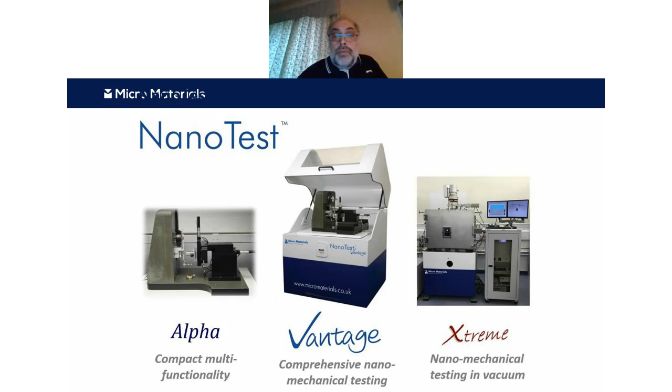So those are the three tools we tend to base our work around. But of course we are a modular system - our philosophy at Micro Materials is to provide high-level research instruments and high-level application support. We very rarely produce two instruments absolutely the same.

You can see on the base system - this is the Vantage system - you can choose loading heads, you can choose your experimental modes, imaging modes, environmental modes, study modes, temperatures up, in this case of the Vantage, up to 850 degrees centigrade.

And other experimental add-ons. Our systems are generally retrofittable, so we can retrofit these devices to current systems in the field, depending on the age of the system. Generally upgrades are done in the field as a general rule, and therefore relatively cost effective - there's no shipping back of instruments. That's the philosophy we have: to keep your instrument completely updated and in line with current specifications.

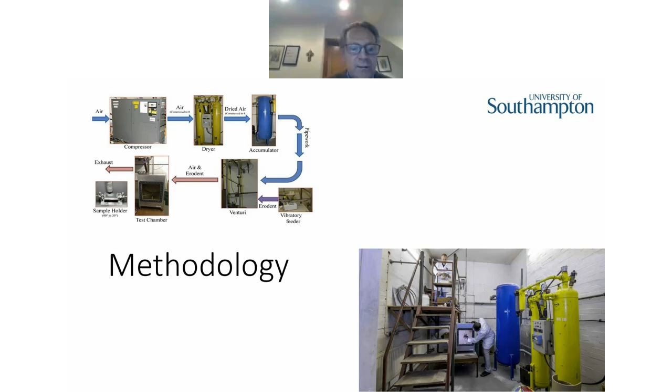The methodology was to do some experiments at low temperature. This is our air sand erosion facility up at the Science Park at Southampton, and it allows us to accelerate particles up to about 280 meters per second, and impinge at different angles. You can look at different particle sizes, particle concentrations.

This was modified by a group design project, our fourth year students, to allow us to cool the system. There is a liquid nitrogen supply in, so the sand comes into this red bit here, into accelerated airflow, into a venturi, then it's slightly expanded, mixed with the liquid nitrogen, and impinges on the grey sample there, with temperature measurement just below the sample to allow us to control the sample temperature. That's the erosion experimental side of things.

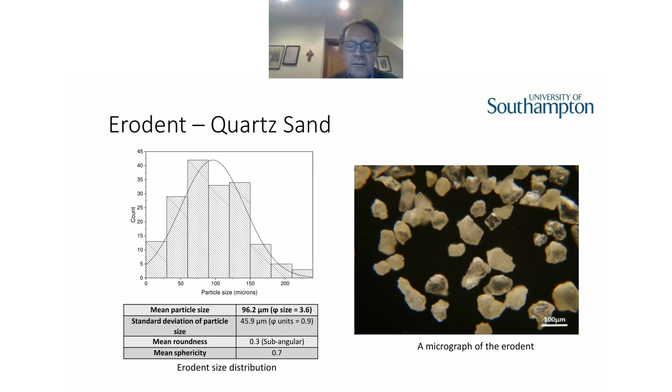The erodent we chose was sub-angular quartz sand, with quite a wide particle size range, although the average is just under 100 microns. The distribution here is quite broad, so there were quite a number of small particles - I'll come on to that later - and equally some larger than 100 in the mix. So that was the type. They are quite angular, with some rounded, so you're likely to get a slight mixture of erosion mechanisms just because of the shape of the sand.

That's what we were looking at. We tried to operate the erosion tests at ambient, so at 25 degrees, and then with the cooling system the students deployed, we could go down to minus 30.

This is a fairly basic test: you weigh the sample before, which is quite difficult with polymers. We weigh as accurately as we can to try and get some assessment of volume loss per particle impacting. The sand concentration, as you can see, is 1.3 times 10 to the minus 4%.

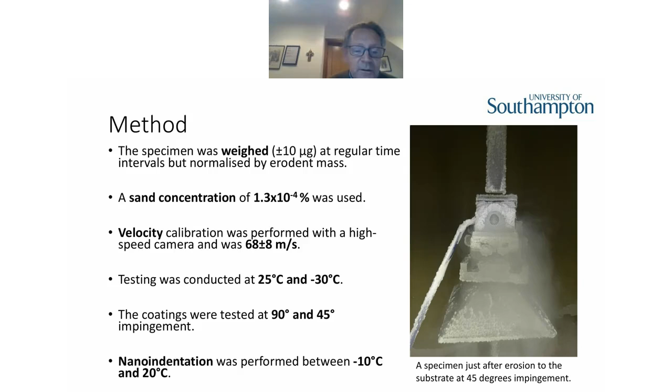We also used the Micro Materials system to get measurements using their nano indentation Vantage system, both at ambient and at minus 10. There was a cooling stage that let us cool both the indenter and the sample, so we could go from ambient down to minus 10 and do controlled depth-sensing work to look at the mechanical properties - hardness, Young's modulus, etc. - from the systems. We were hoping that would give us some insight into explaining the performance you get from the erosion rig. That was the plan, anyway.

So just quickly, some results. The bottom line here - in red on the left-hand bar charts are the ambient results, and the blue are the colder ones. There is an influence of angle, and certainly a very big influence of temperature. As you go down to minus 30, the erosion rate dramatically increases, and there's a subtlety between normal impact and 45 degrees. Those were the basic results, and we plotted them here.

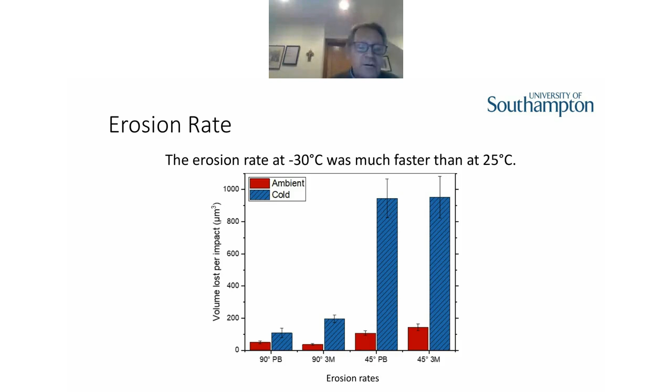As I say, we measure the mass loss, convert that to a volume loss, and then we know how many particles impinge. This is quite a large sample area, so most particles will impinge onto the surface, so you can get a volume loss per impact of sand - a very small volume loss per impact, in cubic microns.

You can look at this ratio - the difference between the erosion rate at 45 degrees and at 90 tells you whether you've got a ductile system or not. If this ratio is above 1, it's ductile; if it's below 1, or around 0.5, it's brittle. We were anticipating some increase in brittle behavior as you go down in temperature, but we didn't actually see that - the numbers are quite high for both systems, going higher, way above 1. So there is an increase in ductility from the crude mass loss rates against ambient.

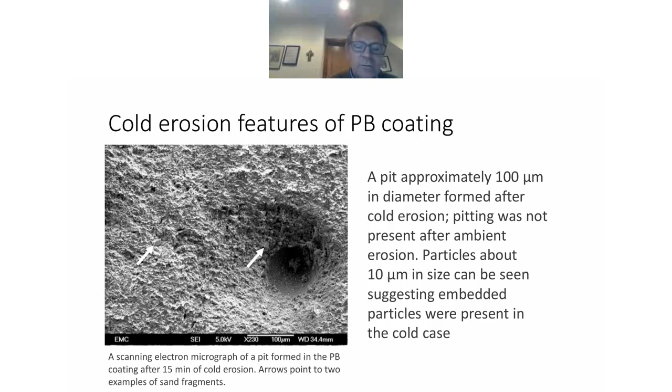If we look at the brushed polyurethane, the 3-layer system on top of polyester, there were some quite dramatic pit features here, and also some fragments or embedment of small particles in the actual coating. You've got quite concentrated loss of coating, which is undesirable, but you also get some embedment which will affect the mass loss—you sort of get a mass gain because you've caught sand in the system.

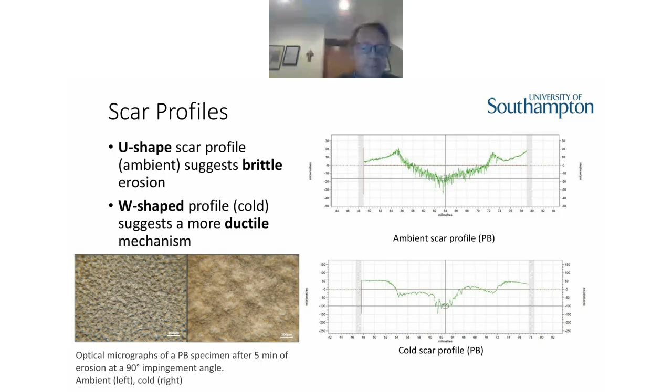If you look at the surface profilometry, a U shape suggests slightly more brittle behavior, perhaps depending on the angle of particle attack, since you get a spread of angles. But if you go to the cold one, you get a much more complicated profile, some pitting and more of a W shape, showing a bit more ductility and ductile process going on as you go colder, which was slightly unexpected. You can see some optical microscopy here of what the surface looks like—so the mechanism of erosion is changing as you go down in temperature.

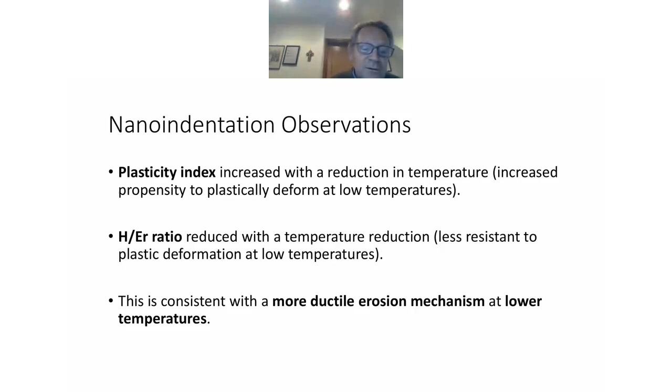So just some conclusions then. The erosion rates definitely are higher with lower temperatures for the polyurethane. There's cracking at the PE layer, which would need to be sorted out going forward, because that will take the service life of the top coats down. It looks like it's more ductile at low temperatures, which is a surprise. You've got nanoindentation confirming that the plasticity index increased at lower temperatures.

The blackening — if you look at the literature, there's some work suggesting that very locally there are thermal inputs possible here, which may well explain some of the processes. So it may be that local heating means the polymer behaves quite differently to what we perhaps were expecting, and sort of plastic mechanisms occur giving enhanced loss, and it might correlate to the blackening of the samples as well. There are other possibilities of stress wave reinforcement or shear stresses that might be explaining why you've got the cracking of the polyethylene underlayer there.

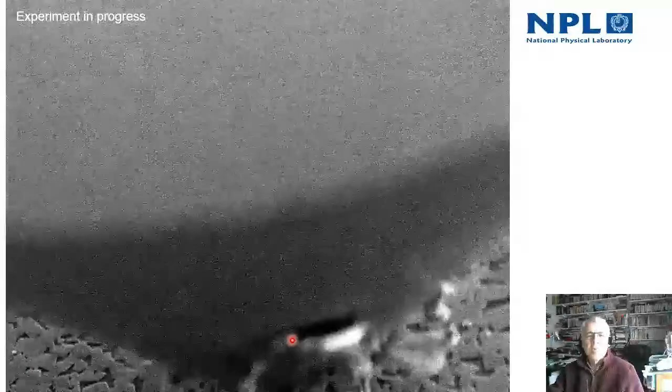So here you can see an experiment actually being carried out, and here an indenter is lowered against the sample, is then dragged across the surface backwards and forwards, and you can carry this out automatically for any number of repeat scratches.

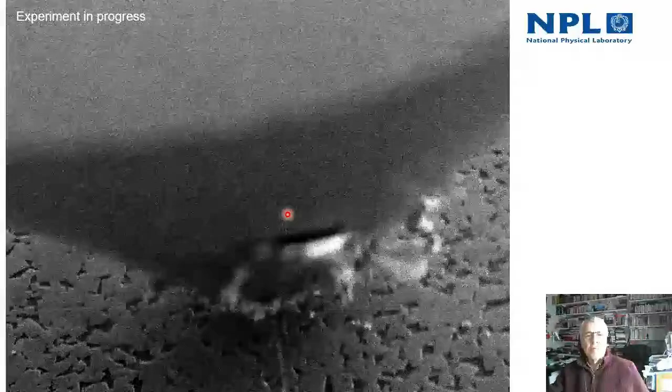The beauty of this is you can actually see the detail of the interaction of the indenter with the surface. In this case, you can see debris that is removed from the surface and is produced there. And when you look at high resolution images, you can see the details of the interaction of the probe with the material and how the damage relates to the microstructure of the material.

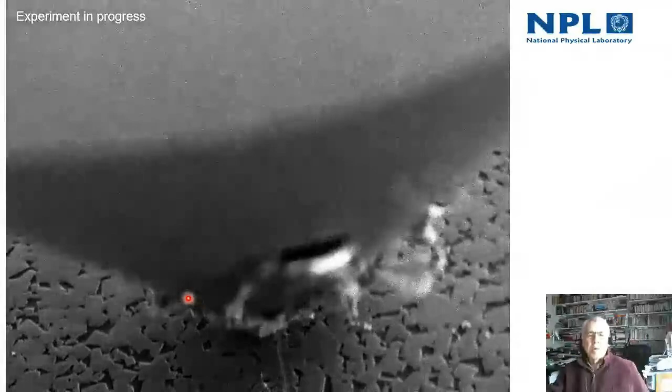So in the next few videos I'll show you, we have rotated the image and we have captured a series of images automatically that show the progression of damage one to another.

So I'll now explore the use of this equipment with examples on 3 different materials: tungsten carbide cobalt hard metals used as tools all over the place, additive manufactured materials which are of current interest, and DLC coated materials.

So in this first example, this is a tungsten carbide cobalt, and you can see the typical structure in the regions away from the scratch of tungsten carbide grains embedded in the cobalt matrix.

And the beauty of this sort of analysis is you can see the detail of how the material behaves under the effect of the mechanical overstressing from the, in this case, diamond indenter. And you can see here that grains of material are fragmenting, they are embedded into the surface of the cobalt, they then flow out from that and into the surface.

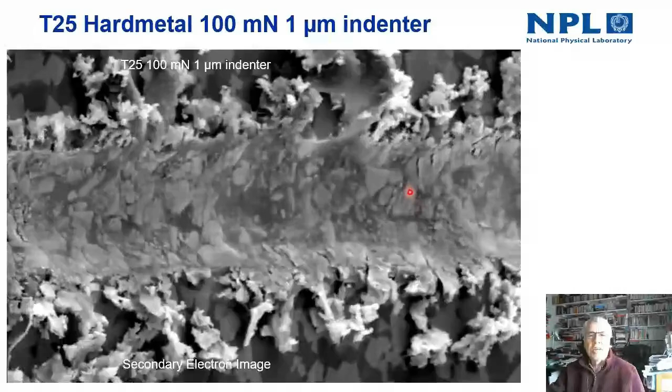So for example, look at this grain of tungsten carbide here, which gradually fragments and is reduced to rubble almost.

And then finally, here's a cubic carbide containing tungsten carbide cobalt material, and if you look at the circles in particular, here are areas where there were specific grains which eventually accumulate damage and then just break apart and fragment and are removed from the surface.

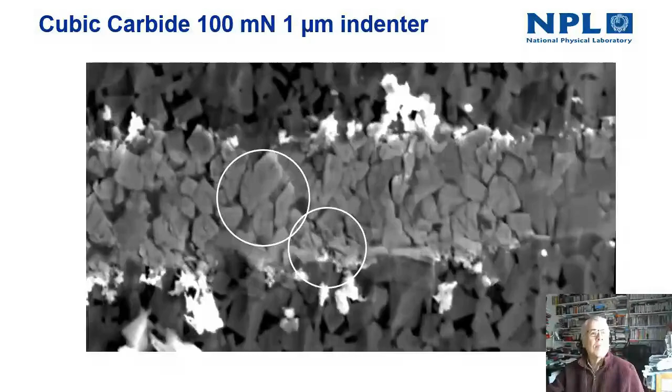So moving now on to additive manufactured materials. This is an example of a collaboration with Imperial College in London, and they were working on how the processing conditions for additive manufactured stainless steel, and there are 3 different processing directions shown here. These 3 images compared to the wrought material shown here, and we're looking at again how the material responds to a single point.

Abrasion process, repeated scratching in a single plane on the material. And here they're looking at details of the differences in deformation that were found between one of the processing directions and another processing direction, and indeed comparing that to the original wrought material.

This image shows the edge of one of the scratches, and it shows a lot of the detail to the side. So you can see a lot of slip line traces showing the detail of deformation in grains to the side of the material, and you can see something called conjugate slip, which is multiple slip planes being activated.

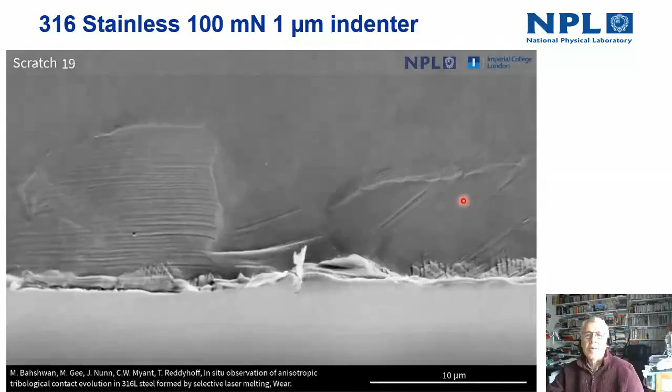And one of the features that interested me in particular here was just here you can just about see a crack forming in this grain. So severe damage and failure is beginning to occur here. This is just outlining where that slip area is.

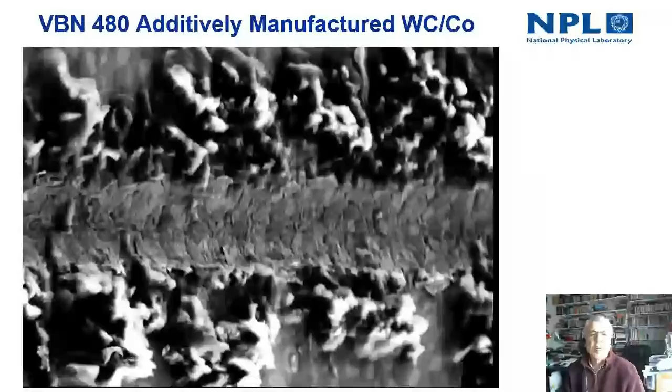This example is a VBN 480 additively manufactured tungsten carbide cobalt material. You can see how the damage occurs at the base of the scratch and the relationship of that with the microstructure of the material. So again, you've got slip lines, you've got cracking, you've got all sorts of damage occurring there. And also, interestingly, you've got these areas where material is pushed out to the side of the scratch itself.

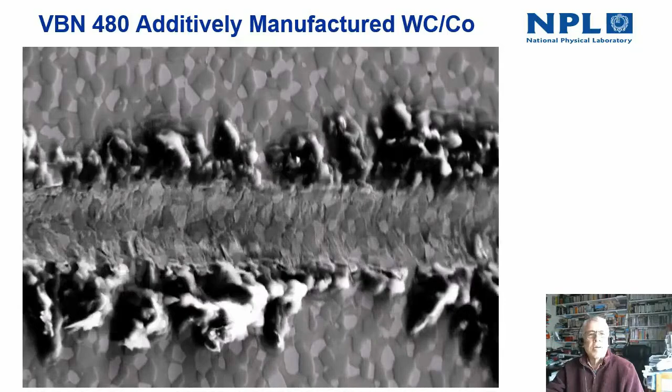And eventually delaminates from the surface and is removed. This work was carried out in a collaboration with the University of Manchester and the manufacturers of the material itself, VBN Components.

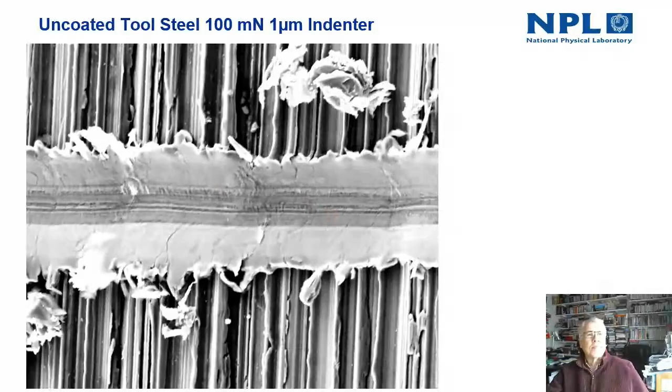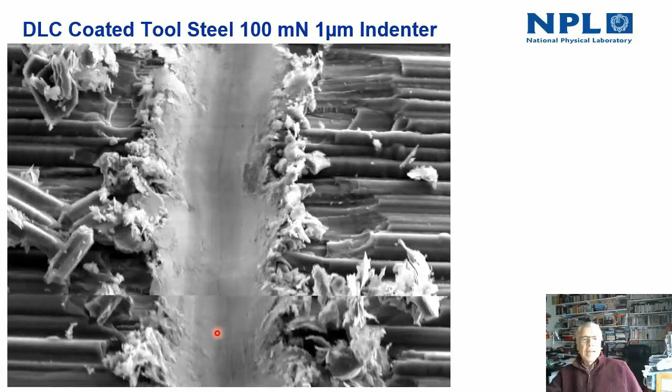This contrasts with the behavior in this experiment, carried out under exactly the same conditions, the same sample as the previous experiment. But here, after the first pass or so of the indenter over the surface, you got totally different behavior. Fragments of coating have just been removed from the surface, and here you see a fragment in motion as the indenter repeatedly moves backwards and forwards over the surface. You can also see in the base of the scratch, as it develops, a lighter area of contrast, where the coating has been removed completely, showing the underlying substrate beneath the coating.

So I just wanted to spend a few moments on relocation profilometry.

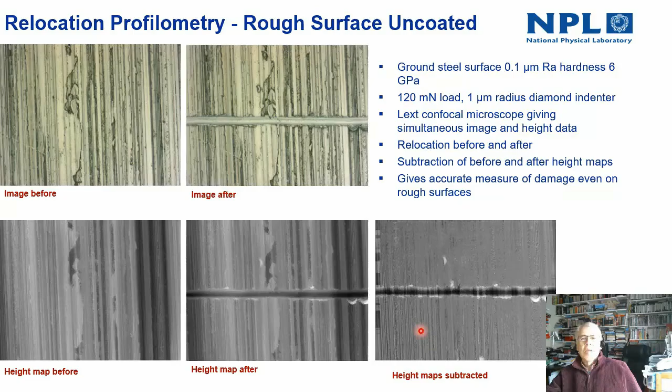Here we've got two roughness values, the rough example you've seen already and also an average material, though I haven't shown any micrographs of this one. In particular, if you look at the loss area, equivalent to the volume of material lost, there isn't any difference between the results for the rough and average samples, but there is a huge result for whether the sample is coated or not — over an order of magnitude difference here.

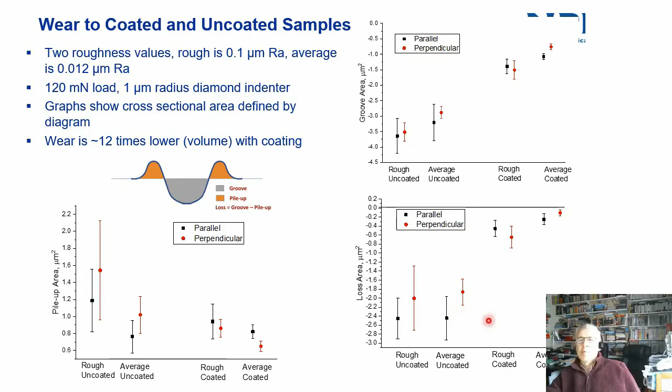So summing up, we are showing you an in situ microtribology test system that's been developed for use in situ in the SEM, but can also be used ex situ. We've carried out a wide range of experiments relating deformation and failure mechanisms to the microstructure of the materials. We've demonstrated it being applied to tungsten carbide, cobalt hard metals, additively manufactured materials, and coated samples. Relocation profilometry is also useful to examine the absolute value of wear, even on rough surfaces. Thank you very much for listening.

Stefan asked, what is the force resolution in the normal and lateral mode of your system? You answered that the resolution can be tailored by changing the fixture elements within the current configuration—it's about 1 millinewton.

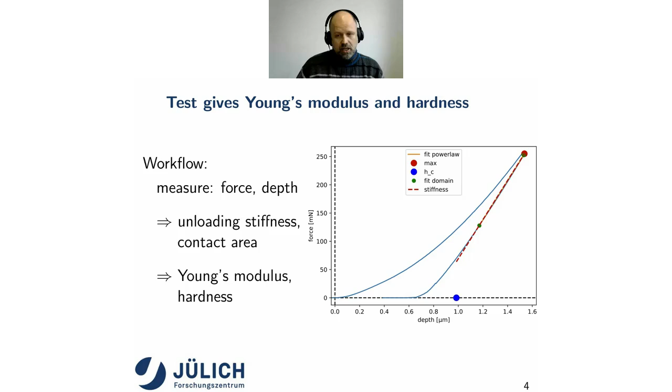As a reminder, typically you measure the force and the depth. From the force and depth you calculate the unloading stiffness. From the unloading stiffness you determine the contact area. Both are evaluated, and from the contact area you then know the Young's modulus and the hardness.

To do this, you generally first have to determine the frame stiffness: how your sample is mounted, how it's glued, how the tip is mounted. You need to know the shape of your tip, called the area function calibration, and how this shape evolves over time. For calibration, fused silica is the material of choice, with a rather low Young's modulus. If you want to indent steel or tungsten, you do extrapolation, which is also prone to inaccuracy.

Lastly, the surface contact has to be identified pretty accurately, which is extremely challenging for high temperature indentation, where there's temperature drift and everything is moving. That's where this work sets in: can we use automatic image recognition to enhance the current use of nanoindentation?

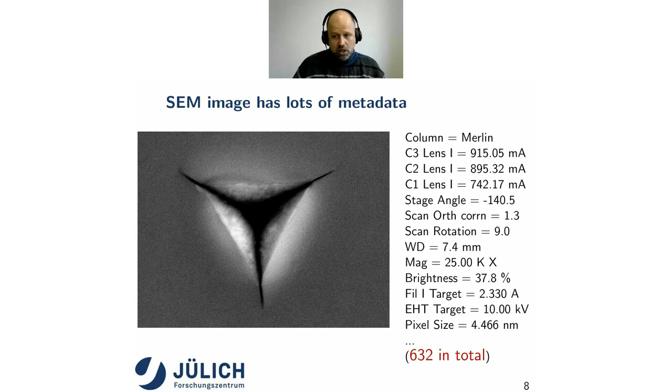If we look at an indent in the SEM, this is how it looks on silicon. You can see the silicon has even broken a little, but you see the imprint. The image we get here, from a Zeiss microscope, contains lots of metadata which we can use to precisely determine the length scale, which is definitely needed to know how large the indent is.

This image recognition is very popular. Even when you drive your car to work in the morning, you might use image recognition to tell you the speed sign on your way.

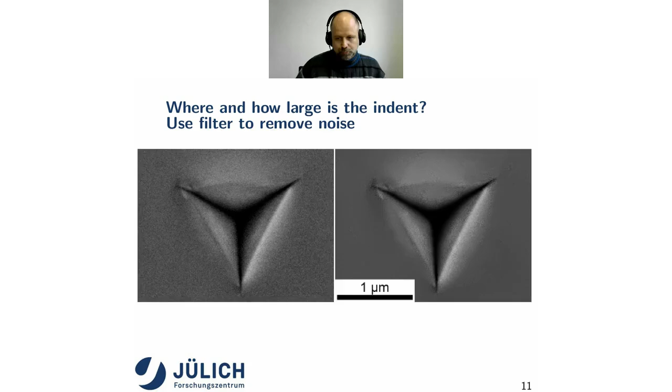The first thing we do is zoom into the image, just for you as the audience to observe it more clearly. Then we clean it up to get rid of noise, which is easier in the surrounding area than in the area of the indent itself. Then we threshold it by a lower and upper boundary, giving us basically a black star and the white areas surrounding it. Now we can use this information to determine the contact area.

In the first approach, we use just the black area and its three corners to identify the corners of a triangle, then calculate its area. In the next approach, we use the white area and draw a convex hull around it, but that area is definitely too large since it includes lots of plasticity. The third approach uses the convex hull we identified, but then draws an equilateral triangle into this convex hull circle, giving us a third approximation of the contact area.

Once we have the contact areas in pixels, we can use the metadata I just explained to calculate the real contact area.

And this is how it looks like in detail. The blue line is a connection of the 3 black distant points. The orange line is the convex hull of all the white areas. Then we draw a circle around this convex hull and can draw a triangle into this circle, which I have not shown in this image, just to make it easier and more clear.

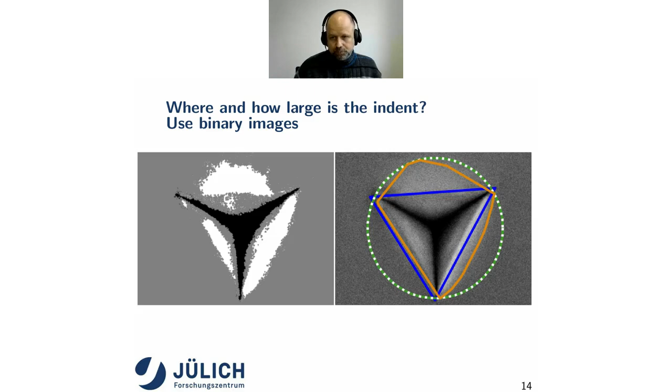So now we know the contact area. Once we know the contact area, we can use nanoindentation analytics to determine everything like Young's modulus and hardness.

And we use these 5 unloading cycles to determine the frame stiffness for each sample that we use. So let's say we have 5 unloading cycles and 16 indents or 16 measurements, and we have roughly 80 unloading cycles, which we then can use to determine the frame compliance for this specific sample.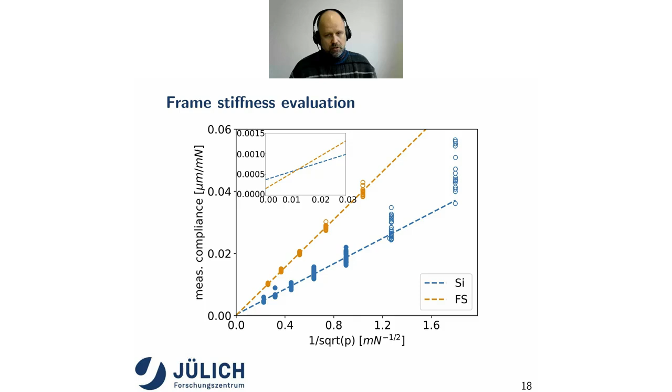And that's what I really want to drive home here, is that the frame stiffness evaluation, which is the intersection of the blue line with the y-axis, is not constant. So different materials will lead to different intersection points just because you have mounted them slightly differently.

Once you have the frame stiffness or frame compliance, however you want to call it, you can calculate the hardness and the Young's modulus. The hardness, well, that's according to textbook, force divided by area. The Young's modulus is a reduced Young's modulus, but if you use the Sneddon equation, which goes into the traditional way of calculating the Young's modulus during nanoindentation, you subtract the compliances, and then you can also, from all the data that you have, calculate hardness and reduced Young's modulus.

And just as a reminder, the contact area we obtain directly from our SEM results. And the important point here is that I did not have to know anything about the tip shape. Well, I knew that it's triangular, but nothing else. I did not have to identify the surface contact, and all the drift that accumulated during loading did not enter my evaluation. So those points are rather good.

But the real test is how does this method compare to the traditional way of using what is called the Oliver-Pharr method. And if we do that for the hardness, we see, I told you before, we have these three measures, or three ways of measuring the area. One is triangle of corners, one is the triangle in the circle, and one is the contact in the pileup. And then we compare it to the traditional Oliver-Pharr method.

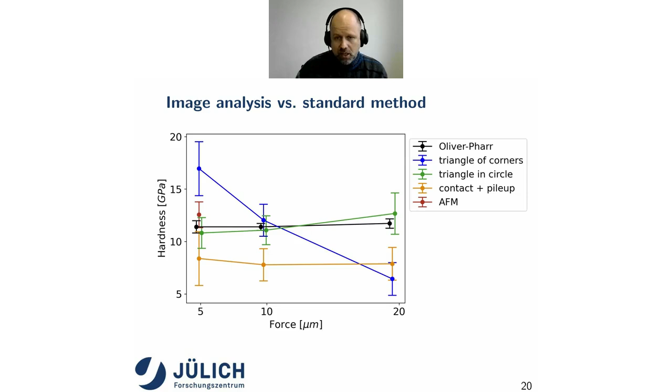To discuss the challenges, this data science approach and image recognition has some potential, definitely. Especially we see great potential at high temperature, where the artifacts that are traditional in measurements don't manifest themselves. This material, silicon, was definitely very difficult for this pilot study, and we definitely have to improve the algorithms to better identify the contact area.

The great advantage of companies like Google is they have lots of manpower, and they only have to identify whether the speed sign says 60 or 65 miles per hour. They don't have to say the size of this image, and the precise size evaluation is a little bit more difficult. In these cases, it was very helpful to us to look at the metadata, especially when we want to link the SEM images to the nanoindentation positions. The metadata, which is saved in all cases in the SEM data and in the nanoindentation data, is very helpful for this linking, and then we can automatically link the measurements.

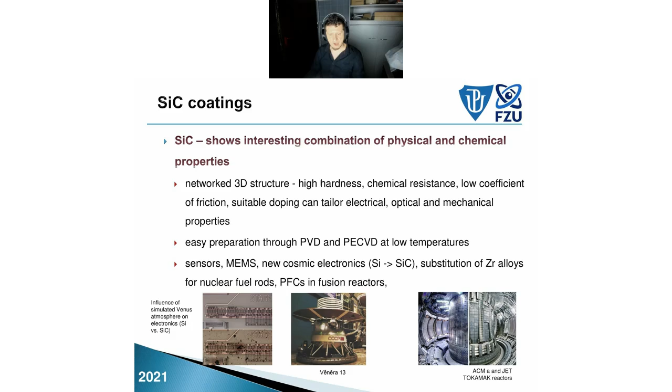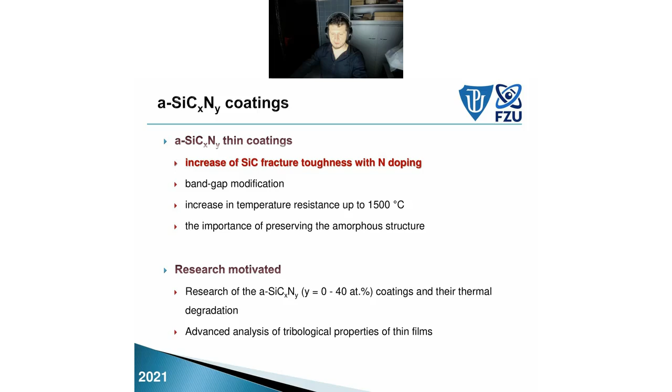How to change it? As I said previously, we can dope it. In our research, we doped it using nitrogen to improve properties, mainly mechanical properties and heat resistance. We doped it in different ratios to observe the results, and we performed several analyses: composition, structure, but mainly I will talk about mechanical and tribological properties.

Our coatings were prepared using DC magnetron sputtering from a silicon carbide target. We used an argon atmosphere in the chamber and increased the ratio of nitrogen to argon in several different ratios, and these ratios give names to our coatings. Here you can see our several coatings, from pure silicon carbide to silicon carbonitride with increased nitrogen composition, and I will show you soon how this ratio affected the real elemental composition of the coating.

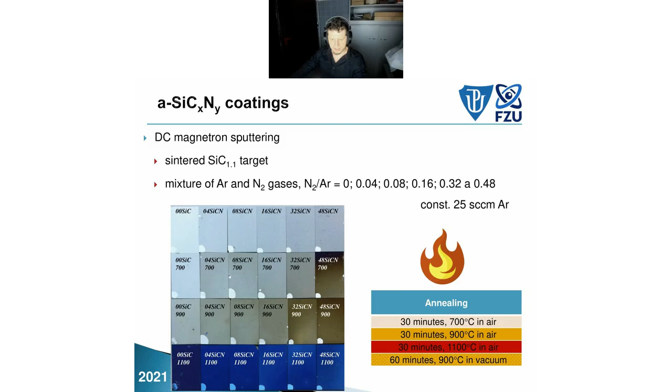After annealing, we performed several treatments at 700, 900, and 1100 degrees Celsius, and you can see here how it affected our samples visually. There is an interesting coating creation or oxidation layer. To analyze this oxidation layer and eliminate its effect, we also annealed in vacuum. We performed several measurements, but I will mainly focus on mechanical and tribological properties.

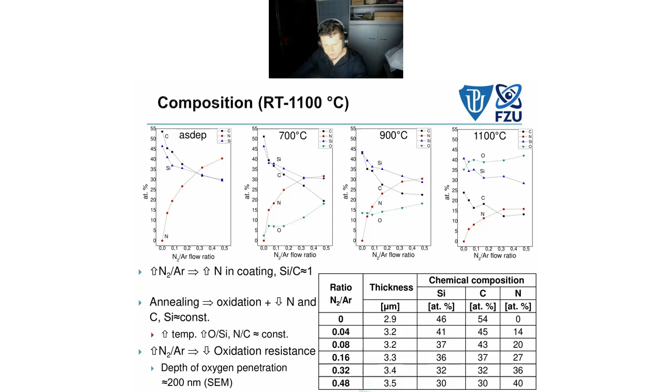Composition: different ratios give rise to different compositions. As you can see, we have roughly a 1:1 silicon carbide, silicon and carbon composition, and increasing the nitrogen-to-argon ratio increases the nitrogen content. After annealing, oxygen increased - so apparently we have oxidation here - and nitrogen decreased, while carbon also decreased a little.

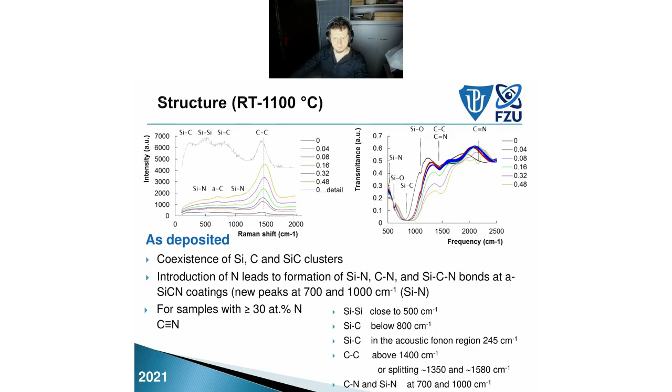So we have strong oxygen penetration into the material and creation of an oxidation layer, something like 100 to 200 nanometers thick. Structurally, it's generally an amorphous structure, and introduction of nitrogen leads to formation of Si-N, C-N, and Si-C-N bonds. After annealing pure silicon carbide, there is creation of silicon carbide nanocrystallites - not full crystallization, but partial crystallization. In silicon carbonitride, there is a splitting of the carbon-carbon band, indicating graphitization. So we can see that oxygen and nitrogen promote organization in the carbon phase.

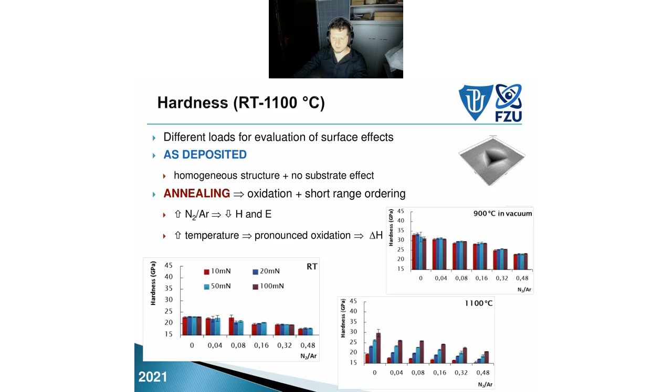This is annealing in air, so we can see this oxidation layer effect is much stronger. But overall, this system has higher values, at least at 900 degrees Celsius, which means there is an increase of hardness and mechanical properties due to short-range ordering, but also surface effects due to oxidation. We tested this oxidation effect using vacuum indentation, because during vacuum annealing at 900 there's no oxidation layer formed, so we see no depth effect during indentation, just the increase in mechanical properties. But let's check the tribological tests.

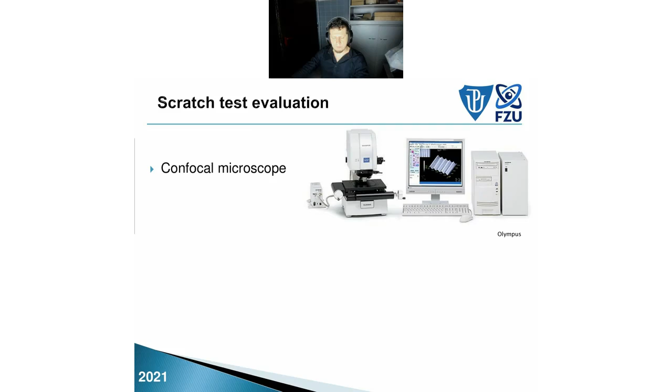We used progressive scratch tests, the standard scratch test from zero to maximum load, and analyzed it using different techniques. Typically, when analyzing tribological properties during scratch tests, pin-on-disk tests, and other tribological tests, you use optical evaluation. We also used a confocal microscope, which gives better resolution than a normal white light microscope. Here are some pictures. We more certainly use the depth change record from the nanotest itself to evaluate the cracks or delamination of the coatings - the jumps in depth.

I will speak a little more about acoustic emission, because we have developed our own system of acoustic emission detection during the scratch tests. The system was developed in cooperation with Dakel company from Prague, and this system we have patented. Great thing is it's easily adaptable to any tribological system or nano indentation system.

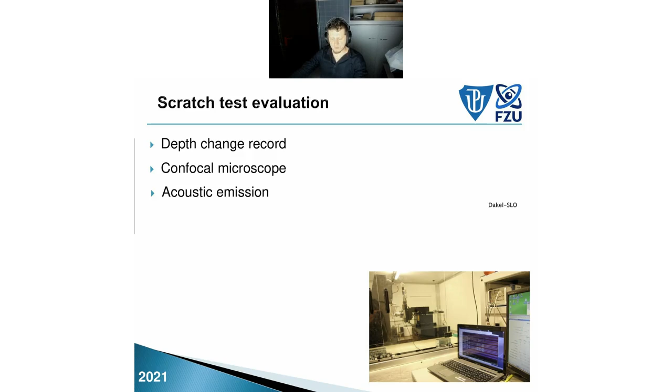We have it here adapted to nanotests. At the end, we have the record, which we can correlate to previous data, to depth change record, to confocal microscope images. This is how it looks like. This is the normal holder that we generally use in the nanotest platform 3 or in Vantage, and this is how our system for acoustic emission looks like. Actually, it's a piezoelectric sensor embedded into a specific holder, and we are using it in connection to our own analyzing unit.

Okay, so let's show our evaluation in some specific cases. This is silicon carbide coatings before annealing, and if we use just one or two analyzing procedures, we can be mistaken. If we just look at the residual image, we can see something cracked here at point 1 - coating cracked, and here coating and substrate cracked. So it's like a loss of cohesion of both parts. Generally, we can check it during the depth change record.

So we have 3 pass tests: first, topography, just checking the material, then scratch - onload scratch - and then final topography. In initial topography, we can see this is the green color, we can see the coating is okay, but there is some asperity going actually above the surface. So the positive values are into the depth, the negative values are up the sample.

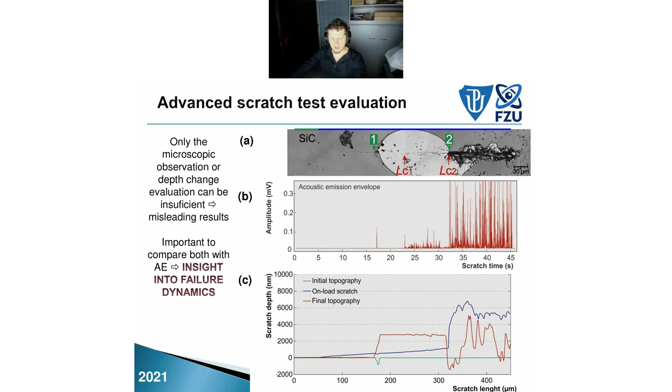So it can show us what we cannot see from microscopic images after the scratch, because if the coating would not crack backwards, we would probably not see it from the microscopic image. But we can hear it using acoustic emission, and the stronger signal here is the breakage of both coating and substrate. So only microscopic observation can give insufficient results. We need more insight into the system, into what's happening there, using depth change record and maybe acoustic emission, which we are using very effectively.

Maybe an even stronger use of this acoustic emission detection system for such a case can be shown here. This is a silicon carbon nitride. As I said, silicon carbon nitride seemed to have lower hardness than silicon carbide. I didn't describe this during mechanical properties - what was apparent from the graphs is that increased nitrogen content means lower hardness, but it may not be problematic during tribological behavior because lower hardness can mean higher ductility.

So, okay, silicon carbon nitride. Here we can see scratch tests, and from image observation we would see just something happening here, and nearly nothing happening here. The depth change record shows - okay, something happening here during onload, we cannot see it so much. And final topography shows this small jump, but this is in the order of 200 nanometers, which means it's definitely not coating.

I didn't describe the thickness of the coating in general - we are talking about 2 to 3 micrometers. So this 200 nanometers is definitely not coating itself. It's an oxidation layer, which was scratched off. The scratching of the oxidation layer we evaluated and confirmed using EDS measurement. We measured this area and saw the decrease in oxygen signal, which means we scratched off the oxidation layer. But in the latter part, nothing was happening - we couldn't see any cracking.

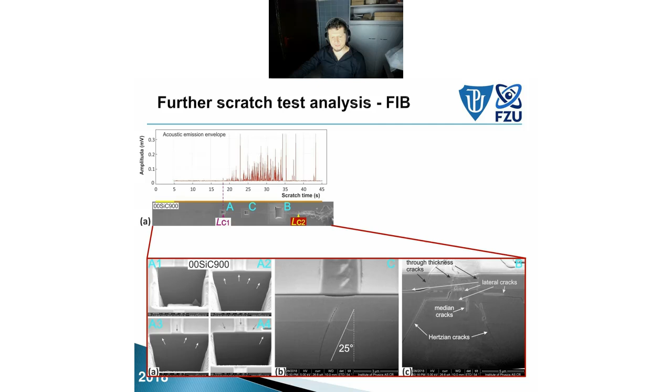And in pure silicon carbide, we saw cracking occurred firstly on the surface. It cannot be seen nicely, but there are semicircular cracks going from the surface into the depths, and some secondary cracking going from the substrate or from the interface. It's a very brittle system. Silicon carbide can be very brittle at high temperature, and silicon carbon nitride here.

This is the highest concentration of nitrogen in silicon carbon nitride we had, and as we saw, we couldn't see anything from the surface. We saw something from the depth change, but not for sure. But we heard it using acoustic emission, and we analyzed the points where the acoustic emission arose, and we saw it nicely. Here, silicon carbon nitride.

This is silicon carbon nitride, so we can see nicely interfacial cracks and cracks from the substrate. So actually, the coating prevailed. The coating was very strong, not so brittle as pure silicon carbide, and we have a nice result.

Just quickly to summarize our results, here are the pictures. We can see in original coatings, scratches in original coatings, some scratch test results. So here LC2, which means critical load, means delamination of coating, and some first cracking, LC1.

So we have some increase in value of LC1 with the nitrogen content, and we have some LC2, some delamination, but not the same thing in higher concentration of nitrogen. So yeah, coatings failed at some maximum load, but not for higher nitrogen content.

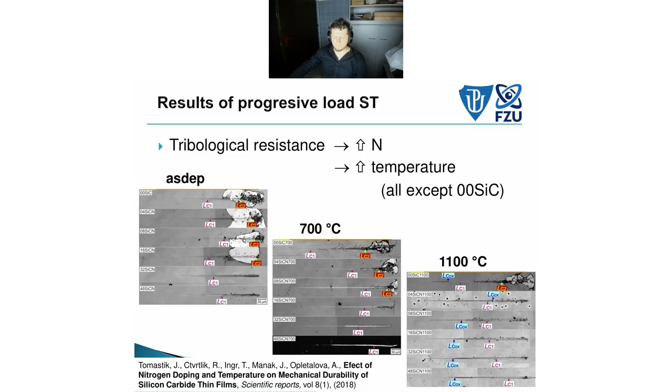We don't see, for instance, in middle sample 16SiCN, we can see in the as-deposited case some cracking, and we cannot see it after annealing. So apparently there are some effects of this changing structure on mechanical properties.

Just some same data shown here in graphs of critical loads. We don't have LC2, we don't have delamination for higher nitrogen content in the as-deposited sample. And after annealing, we see that LC2 is not happening even in lower concentration of nitrogen. And we also have an increase of LC1, the first point of cracking.

So here are some results from vacuum annealing, which shows that even after vacuum annealing, there is some increase in parameters of LC1, which means the short range ordering increases the mechanical properties.

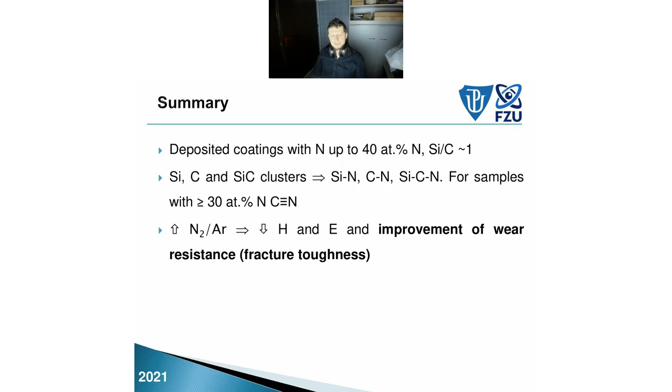So let me summarize the results. We have deposited silicon carbide and silicon carbon nitride coatings. We changed the composition of nitrogen, and we can see that nitrogen content decreased the hardness and elastic modulus, but improved the wear resistance and fracture toughness.

After annealing, we can see there is a decrease of scratch resistance and marked embrittlement in silicon carbide, probably due to silicon carbide crystallization, because it's always better to keep the amorphous structure.

In silicon carbon nitride, annealing doesn't decrease the tribological properties. It actually prevents silicon carbide crystallization. There is a creation of C≡N triple bonds, and it has greater tribological resistance. Okay, thank you for your listening, and maybe we have time for one or two questions.

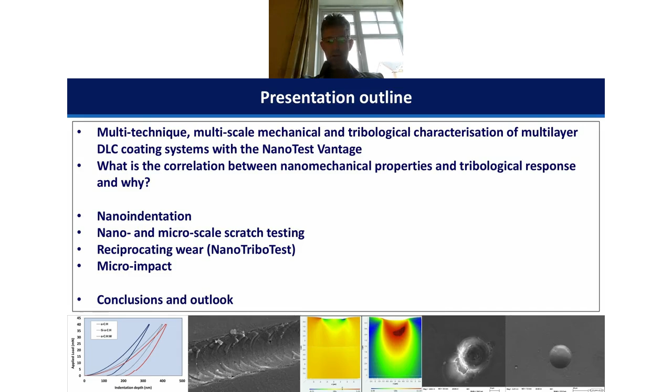So we're going to be using indentation to get the properties. We're going to do scratch testing at nano and micro scales, reciprocating wear with our new nano tribo test, and also a little bit of impact testing as well.

As Chris introduced it right at the beginning of today, we sell 3 instruments, and the flagship instrument for general use is the NanoTest Vantage system. This is a modular multifunctional system that combines multiple different test techniques: indentation, scratch, impact, fretting, and now this nano tribo test, the 5th one, with 2 different loading heads, allowing it to perform tests on the nano and micro scales, different test environments, and as you've just heard from Jan, multi-sensing acoustic emission can be particularly useful to give you additional information about failure mechanisms.

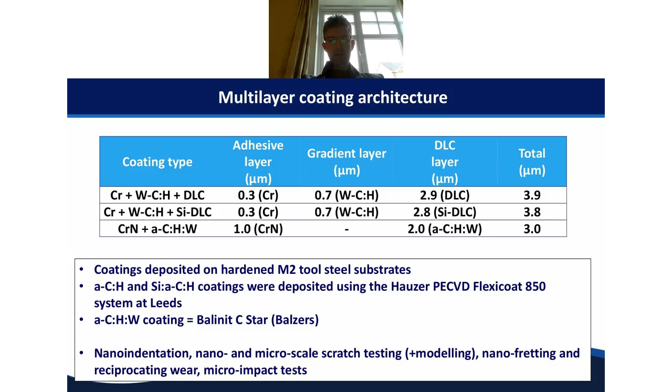So we're going to be looking at 3 different coating systems: one has an undoped DLC top layer, another a silicon doped DLC top layer, and another a tungsten doped DLC top layer. These have all been deposited on hardened M2 tool steel substrates, a couple with the Hauzer system at Leeds, and one with a commercial system.

If we look at their mechanical properties, on the left we can see that the undoped DLC is more resistant to indentation contact. When you analyze the curves, that one typically has a hardness of about 25 gigapascals, and the softest at the other end is the tungsten doped one, at about 13 GPa. On the right you can see the mechanical properties as a function of depth, from indentation depths to different load levels, and they're relatively invariant as a function of depth in this range, which is all about under 1/10 of the coating thickness.

You can also use ISO-type approaches to get accurate elastic modulus measurements, and that was important when we simulated their behavior.

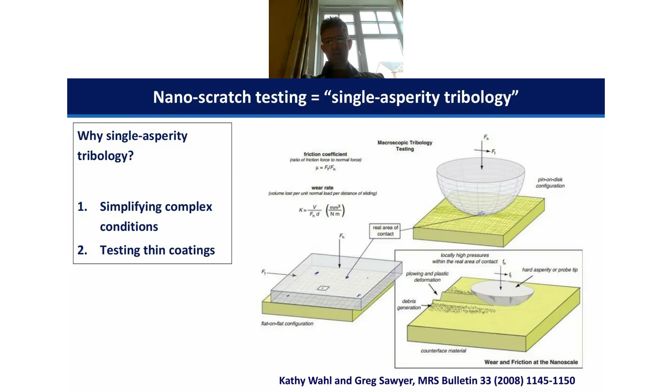So that real area of contact is a much smaller fraction of the nominal area of contact, and these contacts are therefore at much higher contact stresses. If you really want to understand what's driving the deformation in your material, it's useful to simulate these high stress contacts, and we can do that in our single asperity nano or micro tribological tests, where we have a hard asperity or probe tip sliding under very carefully controlled contact conditions.

You've heard a little bit from Jan just now about the 3-scan procedure. This is something we developed over a large number of years, and this has recently led to a nano scratch standard that Mark G and myself and others have been working on for a long amount of time, and that's finally been published.

In the test that I'm going to describe now, we've looked at nanoscale scratch tests with the low load head with a sharper probe, a 5 micron spherical contact probe, and in the micro range with a blunter 25 micron probe.

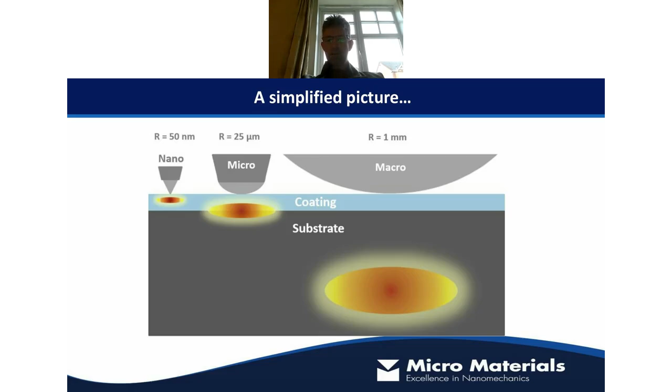Obviously, it's more complicated in the sliding contact system, and I'll show you where we can model this and get more accurate data.

Experimentally, if we do the scratch test on these 3 different hard coating diamond-like carbon systems with this 5 micron spheroconical probe, what we can see is that they're very different in terms of the LY, which is the critical load for the onset of plasticity, and the LC1, which is the critical load for the onset of cracking in these systems.

What we can see is that the hardest coating system here has the highest critical load for yield. Conversely, this system here, the tungsten doped one, has a very low critical load for yield, but it didn't crack before the peak load of the nanotest system was reached in these tests. So there's a clear correlation between the mechanical properties of these coating systems and their behavior in these tests.

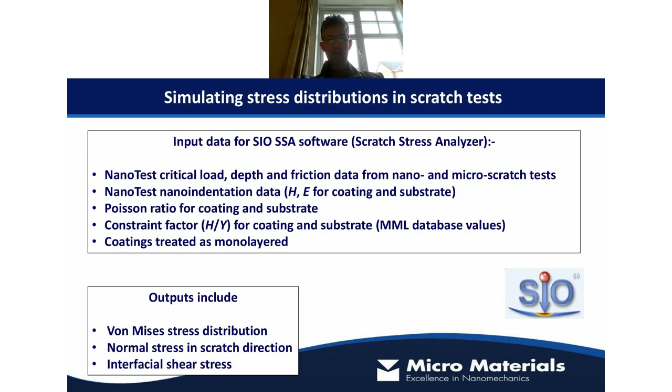We can simulate that with another optional module in the nanotest, this integrated SIO software, in this case the Scratch Stress Analyzer, and we input the data from the indentation testing. Constraint factor is also very important, and this allows us to simulate the stress distributions developing in these scratch tests, getting information about the von Mises stresses, normal stresses, and interfacial shear stresses.

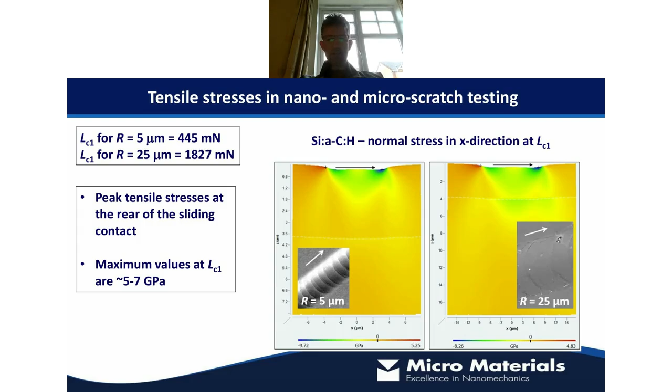We can also look at tensile stresses. These form at the back of the sliding probe, with a maximum there. Even though the critical loads in nano and microscale scratch tests are quite different, they actually correlate to quite similar tensile stresses in these tests, suggesting there's basically a similar mechanism, or the same mechanism, going on.

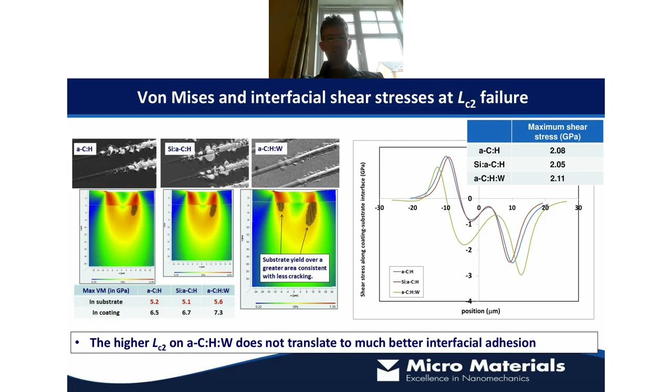We can also look at interfacial shear stresses. Despite these differences in LC2, when we actually do the calculations within the SIO software, the stresses at the interface are really relatively similar. This suggests that it's the mechanical properties of the systems giving the apparent differences in adhesion, as opposed to a true interfacial difference between these coating systems.

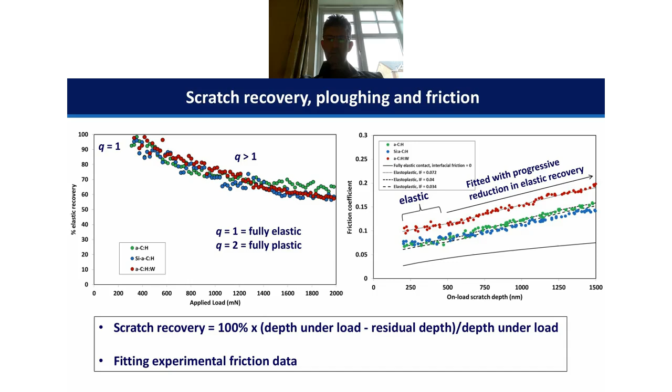We know that information because we have the depth recovery during the scratch recovery in the test. So when we come to fit the frictional data as a function of depth, we can accurately fit this transition where we see a gradual increase and then a quick, more rapid increase - this bilinear behavior. We fit that with this equation here, which works nicely because we have this depth-dependent information.

We can also use those same parameters to fit the nanoscale scratch test, and this is a reasonably encouraging fit with exactly the same parameters.

What I've shown so far is that this picture of understanding wear rate and contact pressure, if we consider the depth of the peak stresses, gives us better understanding. What we can say is if the peak stresses are well within the coatings, then relative abrasion resistance is controlled by this factor of Y over E. But at higher load, plasticity in the substrate becomes important.

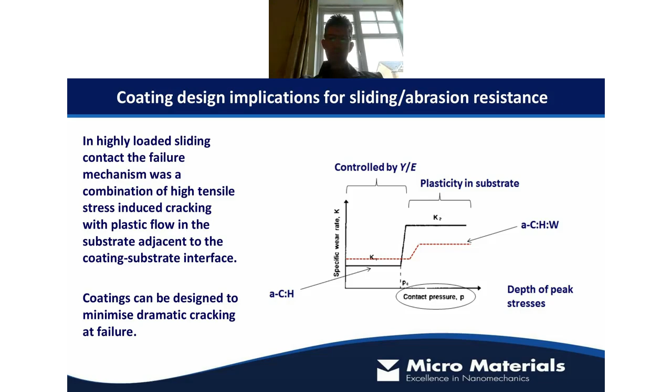So we've looked a little bit further at these sliding contacts with our new NanoTribo test. Here we have an additional stage which we control within the NanoTest software, and it rapidly goes backwards and forwards. This allows us to perform very high cycle tests, very long track sliding distances, and we can even combine with electrical contact resistance measurements.

So just to emphasize, this new module really expands the range of test capability - the nanotribological test capability that we have within our NanoTest Vantage system. It allows us to achieve very, very high sliding distances in comparison with what might be more normal in terms of a nano scratch test.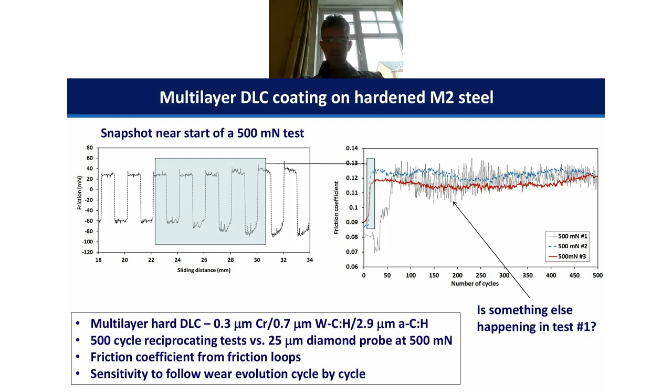So essentially you're getting a cohesive failure mechanism within that coating system, and that's quite important in terms of coating design. It's a bit of a limitation.

So we've looked a little bit more in detail at that with our impact test capability. For those who haven't seen it before, think of it a bit like a woodpecker tapping at a material. We fire this probe backwards and forwards, and it generates multiple high stress contacts - true impact events - that allow us to fail materials at high strain rates.

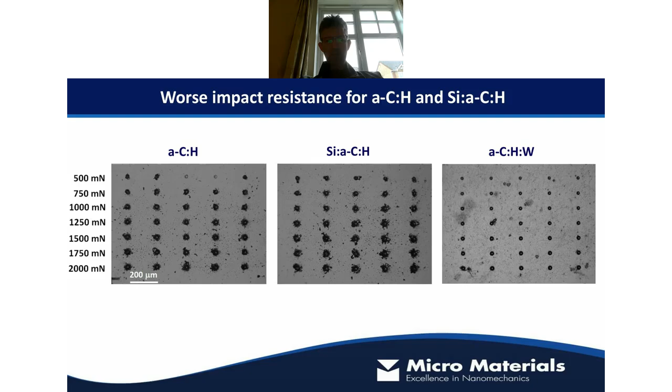You see a couple of ones here where it hasn't failed. If you look in a little bit more detail, you can really see that interfacial failures are the cause of the issue in these coating systems. You see exposure of these sublayers, and in this case, even exposure of the steel substrate underneath.

Hopefully what I've shown you is that no coating is perfect in every test. So if we're designing coatings, we really need to design these coating systems with thought to the actual applications that they're likely to be exposed to.

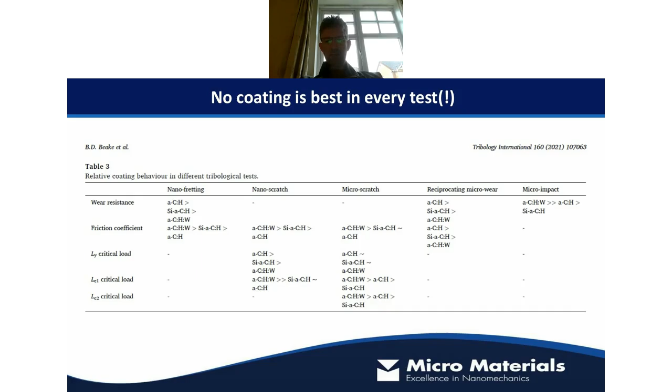Hopefully I've given you a flavor of how, when we do this multifunctional characterization, it really gives us a lot of insight into why coatings perform well in some conditions and not others. It really helps from a coating design point of view, and once you have that fundamental information about why things happen, it enables you to start to design better systems to mitigate these things.

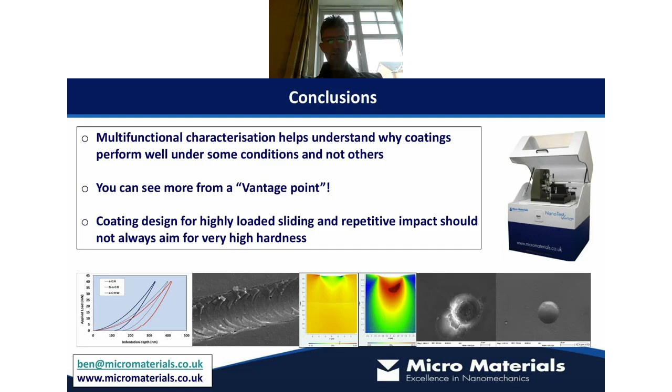One point I didn't stress hard enough: if you have particularly repetitive impact, you shouldn't always aim for very high hardness in the system. This is maybe a cheesy point, but we do call the system the Nano Test Vantage, and you do see more of a vantage point, particularly when we keep adding things to the system.

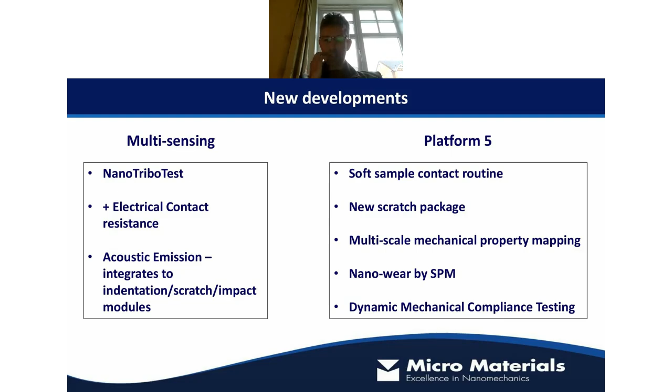So when we think of performing measurements on extremely low stiffness materials, this is quite a challenge for an indentation system, because when you detect contact, you have to have something that says, right, I've detected contact, now I can apply the load. So if you have a typically stiff in the direction of the loading head system, then it's very, very difficult to detect that additional stiffness from the contact. So this flexural stiffness of the loading head determines the ability of the system to detect contact.

And if you look at how the nanotest stacks up against any other nano indenter, you'll find actually we're uniquely suited to very accurately measure these low stiffness materials. So we have a very low stiffness loading head, so consequently that means that we can detect low stiffness materials more easily because they're a bigger fraction of that loading total stiffness that you're measuring.

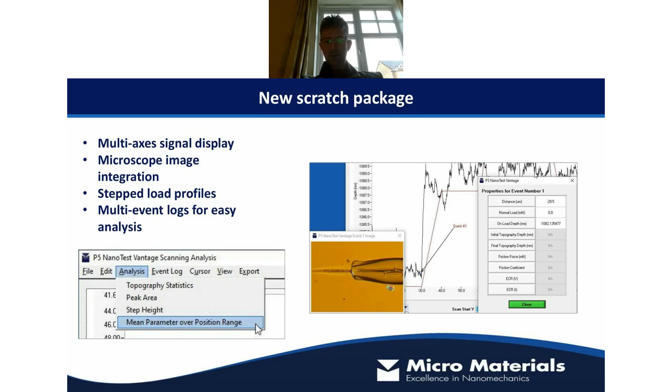This is just a couple of little examples of this new scratch package, which Steve has completely redesigned. So we've arranged for analysis, report writing, different load profiles, statistical approaches, integrating with the microscope. There's a whole bunch of new things in there, and we're quite excited by that, and we're still learning about the capability that we can do in that system.

We also have this ability to look at the very fine scale mapping and rapid mapping with the Platform 5 in conjunction with the nanopositioner stage. So if you have this nanopositioner stage, the SPM nanopositioner stage in your test, it really allows you to get the most out of Platform 5.

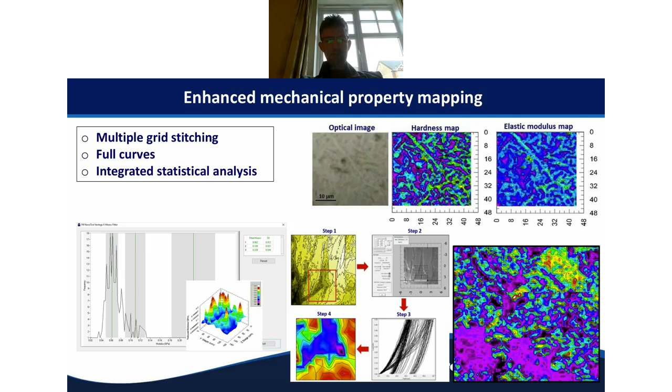The other things you can do with this system is you can stitch multiple grids together. There's an advanced statistical package now for pulling out the individual properties of the different phases in a system.

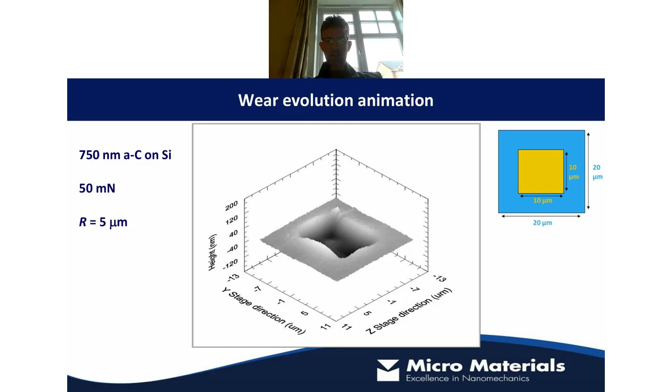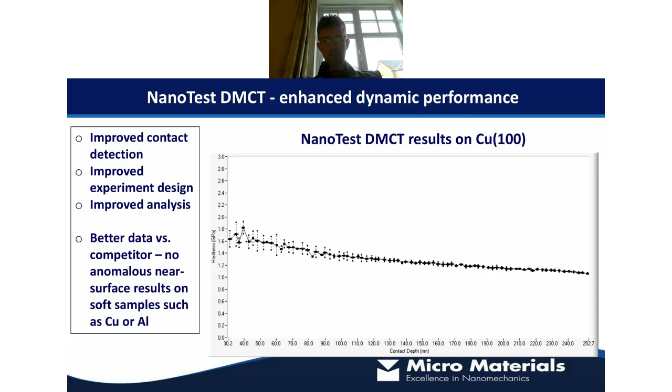So we do have this additional test capability. We don't show it off much, but we do feel that there's potentially great scope to expand our capabilities in this area, because we do think it maybe has a lot more advantages over the competitors.